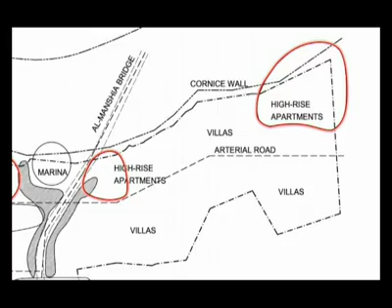The city of Khartoum, significantly located at the point where the Blue Nile converges with the White Nile, has long been regarded as the melting pot for the people of Sudan, epitomizing a free land where various tribes, communities and cultures of the Middle East interact and mingle. The locational advantage of the city has inspired further developmental plans in the area, with the view to establish greater economic upliftment and stability.

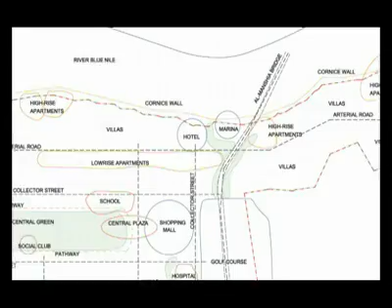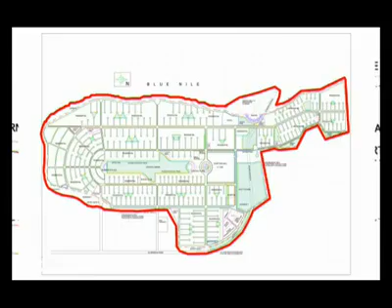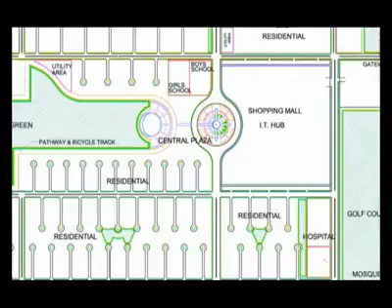This new project is an integrated self-sustained planned city conceived on a truly grand scale, just a few kilometers from Khartoum on the eastern banks of the Blue Nile near the Al-Manshia Bridge, appropriately named the Blue Nile City. Stretching across 1,000 acres of fertile land alongside the river, it is uniquely designed to accommodate around 50,000 people with every probable comfort and convenience, comprising residential and commercial complexes, entertainment and cultural centers, resorts, educational facilities, hospitals, highways, parks, fountains and more, all of world-class standard.

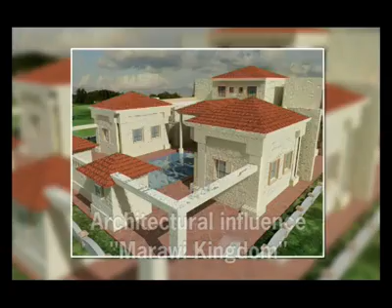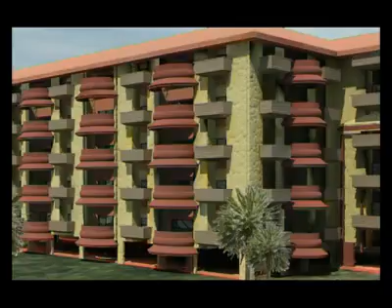The entire architectural outlay exudes modernity and is yet picturesquely reminiscent of the rich history and culture of Sudan. Every structural feature has been studied and incorporated based on the impact of the climatic conditions and the turbulent nature of the River Nile.

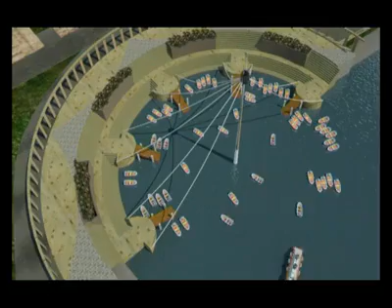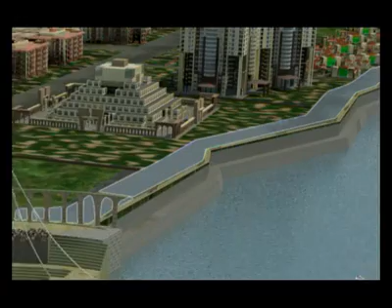The 6.5-meter high corniche wall surrounding the city will ensure total protection from floods. At the same time, the special design will allow silt deposits to be collected easily for enriching the green areas. Viewers can still enjoy a view of the Nile by way of pathways created at the edge of the corniche. Three grand gateways lead into the city proper.

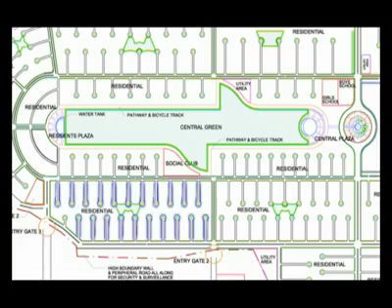What first greets the eye is the sheer beauty and majesty of the Blue Nile City: spacious concrete structures, abundantly interspersed with trees, parks, cul-de-sac roads, and alleys fringed with greenery. A tour through the different areas of the city adds to the enchantment.

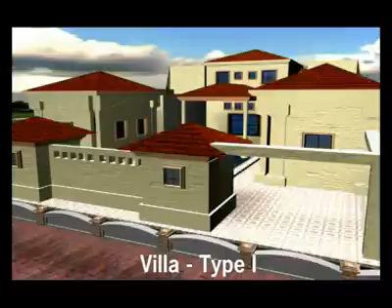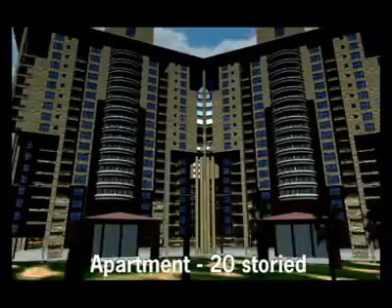The residential sector, occupying about 50% of the total area, is elegantly laid with sprawling villas and landscape gardens, while stylish 20-storied apartments have been planned to provide accommodation to a larger number of people. At every instance, the cultural and Islamic traditions of the people of Sudan have been kept in mind to facilitate a strong sense of bonding amongst neighbors.

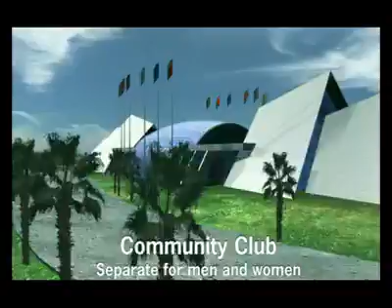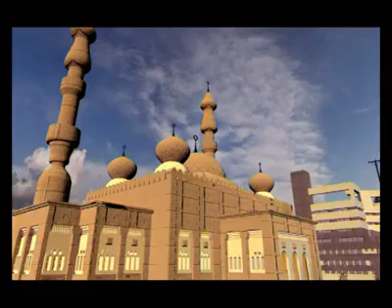There are community clubs for both men and women, along with entertainment hubs and sports complexes. Two grand mosques at the two ends of the city have room for 1,500 people to pray at the same time. Residents and visitors of the Blue Nile City can also interact at the central plaza or unwind along the cool water bodies built amidst the complexes.

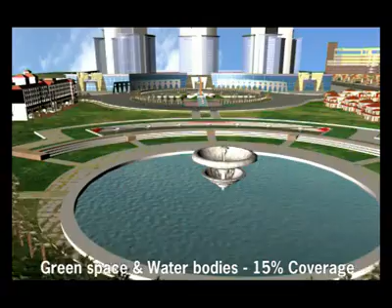The green spaces together with the water bodies occupy almost 15% of the city area, maintaining the climatic equilibrium within the city.

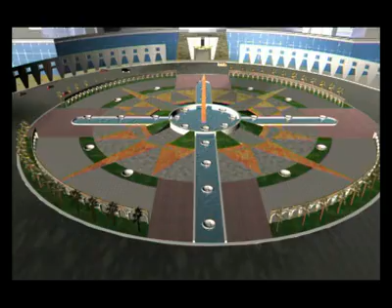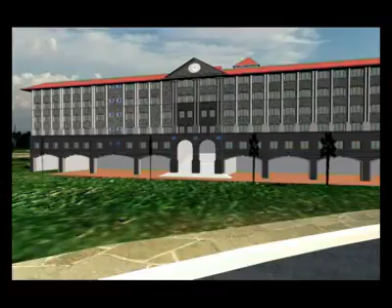No advancement is possible without sound knowledge and education, which is why special attention has been paid to the quality of educational institutions to be set up, so that youngsters from the city are able to compete at global spheres. From primary to high schools, to institutes offering advanced course studies, the academic facilities of the city promise complete and wholesome guidance to pupils.

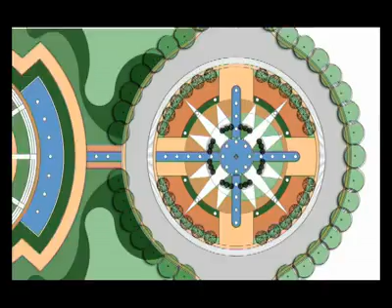The commercial sector projects the global face of the Blue Nile City. Spread across nearly 10% of the total area, the prime attraction of this sector comprises a sophisticated shopping mall, designed to be one of the largest in the Middle East.

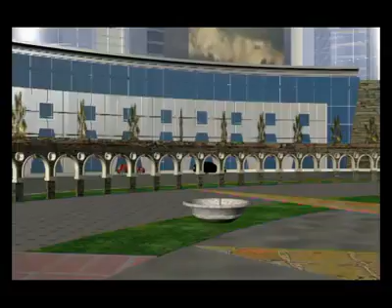The mall stretches onto the Gateway Mall on the Al-Manshia Bridge, bringing a world-class shopping experience to the residents of the Blue Nile City and visitors from Khartoum and other neighboring states.

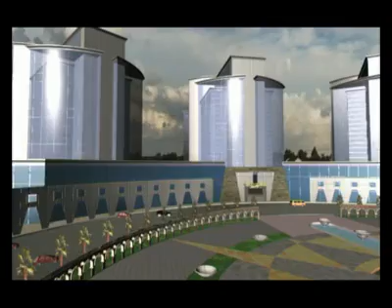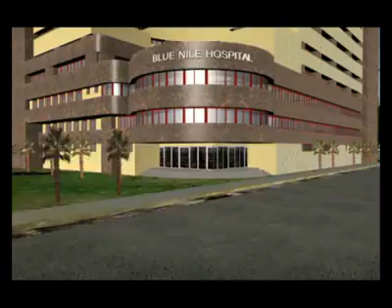More facilities in this sector include an IT hub, administrative and security offices, fire station, and other general offices. Added to this is a 5-star hotel, a luxurious marina, a rolling green golf course, smooth and wide roadways, clutter-free vehicular movement and parking places, all of which add to the joys of fine living in the Blue Nile City.

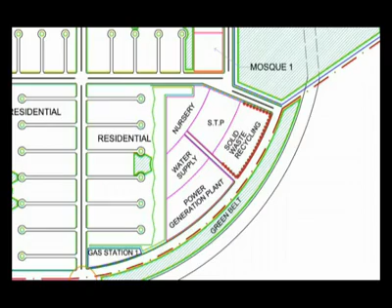In order to facilitate smooth functioning of all the amenities, large-scale provisions have been made to set up the city's own power generation plant, supported by gas turbines to minimize pollution, a drinking water reservoir and supply pipelines of international standards, the most hygienic and efficient waste management and recycling system, and an extensive network of underground drainage systems.

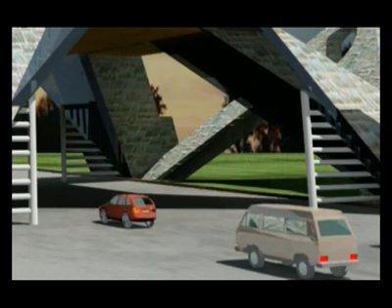The Blue Nile City promises not just a good life, but also a secure life to its people, which is why critical arrangements have been made to ensure a high level of security in this area.

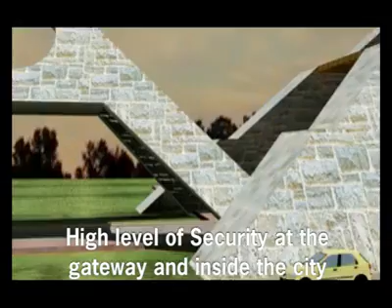Entry to the city is allowed only through the three main gates under high vigilance, backed by a network of electronic cameras, centralized monitoring and highly trained patrolmen.

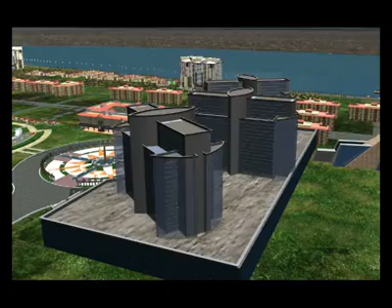The entire city is scientifically planned to serve as a model city for any future projects on a similar scale, and requires a minimum area of 4.5 million square meters to achieve the envisioned parameters of living standards.

For the residents of Blue Nile City, life definitely promises to be above the ordinary, a life that the people of Sudan have long deserved.